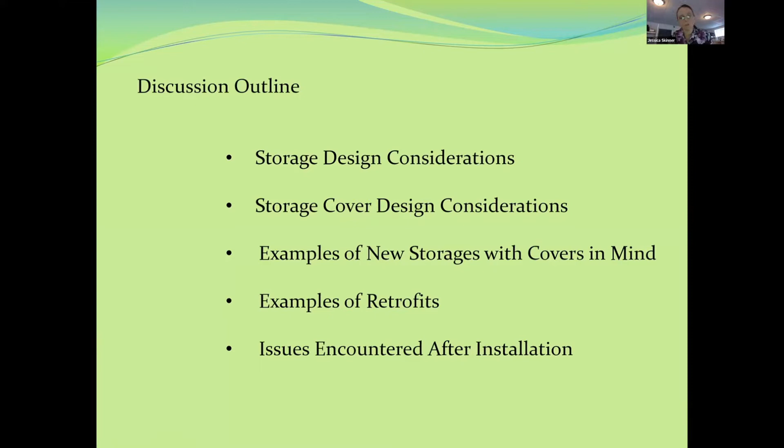Some examples of new storages with covers in mind. Manure transfer in and out. The siting and the topography of that manure storage is going to matter a great deal. Examples of some retrofits and issues encountered after installation. So first, we'll go talk about the storage general design considerations.

Obviously, when we're designing a storage, the very first thing that matters to us as engineers is size. What is the capacity we're going to need? What type of animals do you have? What type of waste are they generating? Other sources other than just the standard manure that you're going to be putting into this system, including, say, for Dale on a dairy farm, you're looking at milking center waste, likely silage leachate control, things that are going to affect the overall size of that storage.

Bedding material also affects what this storage is going to look like tremendously. You heard Dale talk about a few different types of bedding they've used in the past. One that is pretty popular in New York State is sand. Sand bedding does affect a manure storage design more than any other type of bedding. So if you bed with sand, you either have to have a very extensive sand separation system, or you need a way to get into your manure storage and remove that sand.

If you're bedding with solids and sawdust, you can re-agitate those materials from above and don't necessarily need the access to the manure storage. You also notice that Dale pointed out, rightly so, that separation is a huge part of any system that's going to have a cover in it. So is that something that you're willing to look at?

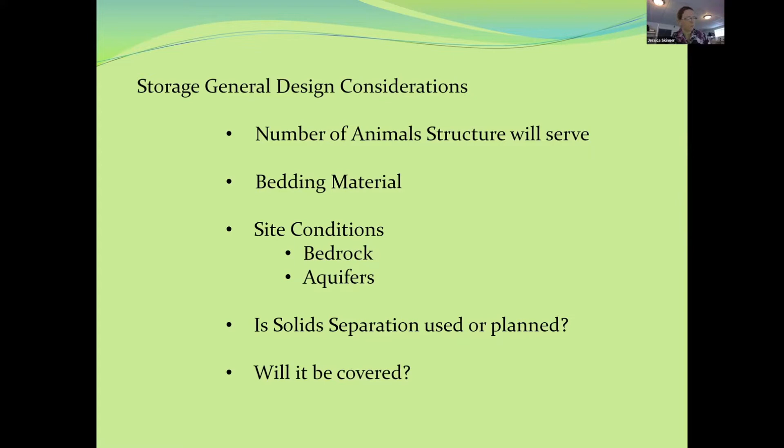So storage design considerations, what type of storage? In New York State, we do mainly 3 types of storages. Earthen, and in that I would consider earthen with both a clay liner and a synthetic liner. So that would be the earthen storage option. Concrete storages, most of those are a vertical walled structure in New York State. And then we do some Slurrystore type structures, which are the glass fused steel type structures. Each of those structures has their own benefits and drawbacks.

With the earthen storage, they're much more easily covered. The concrete storages can be covered in certain situations, but it's a little bit more difficult. And then the Slurrystore structures tend to have a size limitation, so they can be covered. Slurrystore actually makes a cover that goes right on those, but they have a limitation on size of those structures.

When you're designing a manure system, think about your storage pumps. Do you have existing storage pumps? What kind of a riser do you want? Do you want to be able to pump into and out of the storage from a riser? Do you want to pump in and out at surface? Things like that are going to matter to you.

Distance to electrical service, which didn't used to be an issue, but if you want to be able to pump out of a riser, sometimes those are an electrical submersible pump. Also, if you're going to be covering a structure, Dale's flare was solar powered, but a lot of the flare companies do prefer to have a direct connect to an electrical service. And also the pumps for the rainwater, it's easier if you have a direct electrical service.

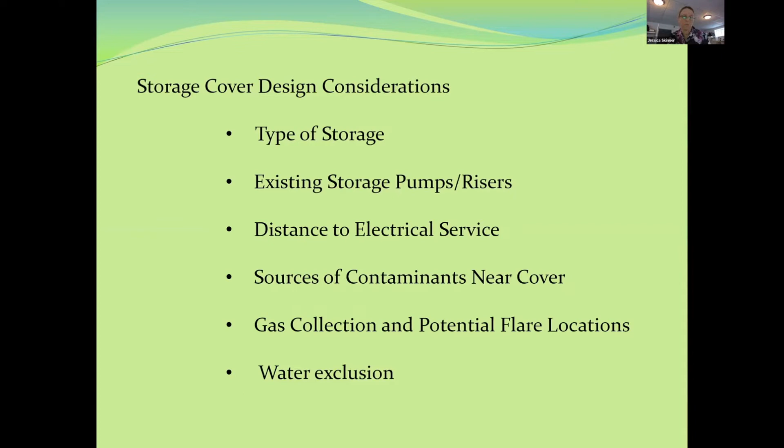So I think what we'll do now is go through a cover installation, kind of start to finish. This is a cover that was installed in Erie County. Alan Young from Erie County Soil and Water took all of these pictures for me during installation. This was a retrofit on an existing manure storage, and we'll kind of just go through the steps that were taken on this particular storage first. I'm going to use my mouse here.

So this picture up here in the upper left-hand corner is a manure riser and pipe into the bottom of the structure. So one thing to think about when you're doing a manure storage, either retrofit or a new design, is that the cover needs to be sealed. And how are you going to get manure into and out of the structure? This pipe going in on the bottom creates a liquid seal. The manure level is above this pipe. So they can pump in and pull out whenever they'd like without opening the cover or breaking that seal.

Over here on the right-hand side, you can see this is the manhole structure, pipe going out of the bottom, and they can introduce from the top or put a pump in the top to pull back out again. Oh, shoot. That just, there.

Down here in the lower left-hand corner, you can see they're getting the cover ready for installation. So one thing to think about when you're covering is you need space to be able to weld the cover together off to the side and then pull it over the storage. So you need a pretty big space to be able to accomplish that. Over here on the lower right, you can see that they are welding together. Dale talked about the concrete weights on his cover. So all those are pieces of cover material welded together and filled with concrete to make the troughs to collect the water.

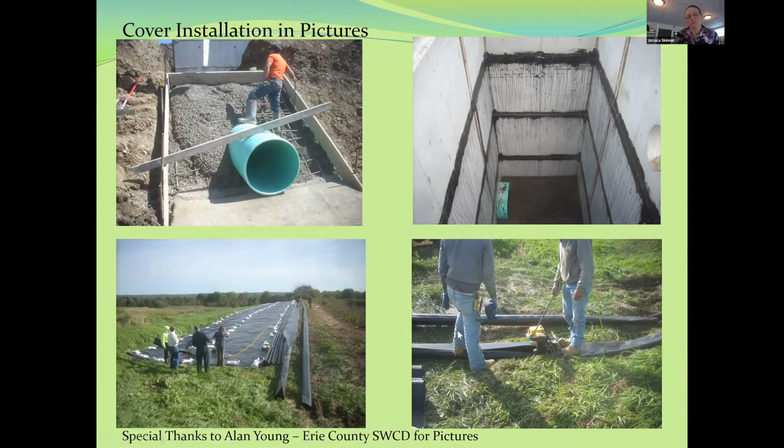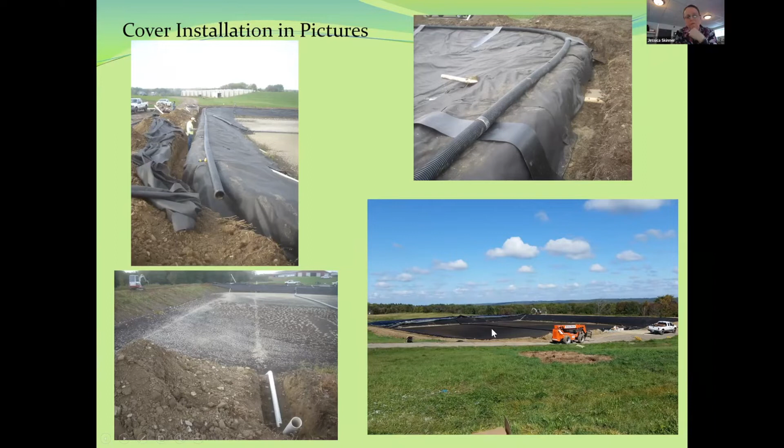They've pulled it across more. They're pulling it across a little bit more in this picture. They float it right across the manure storage when there's liquid in there. So you don't have to have it all of the way empty. You have to have it at a specific level for them to pull it across. That's part of the planning process that Dale talked about. You need to make sure that your liquid level will be at the appropriate level for them to cover when they're able to come.

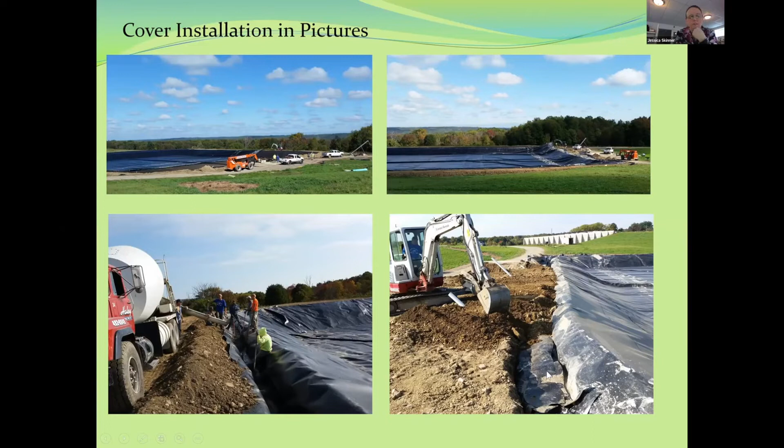This is the stabilization trench. You can see that the cover goes down in, back up, and then they backfill it with concrete. This is just the cover as it comes all of the way across. And then here it is. Here they are finishing up backfilling that trench. So that was a retrofit.

So one of the things when you're designing a manure storage with a synthetic liner, you need to design that anchor trench differently if it's going to have a cover than if it's not. So if you don't have a cover, a synthetic liner just has an anchor trench that's backfilled with earth. Whereas if we're going to put a cover on the top eventually, you want to backfill that with concrete. Small changes like that in the design.

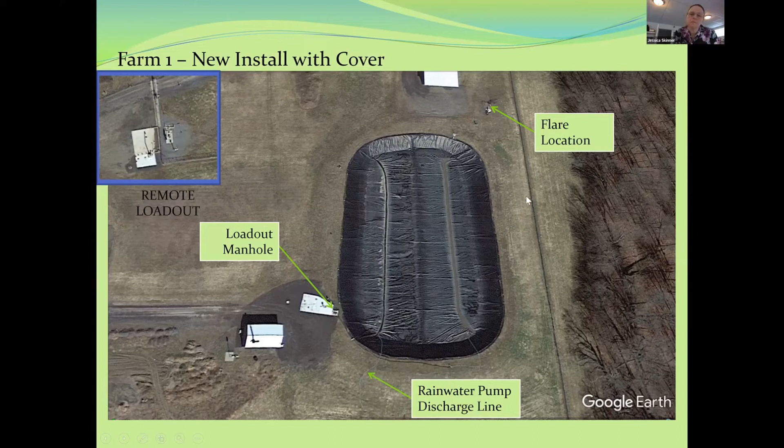So we talked about the manhole. This is actually the finished manhole for the project that I originally showed you. It was a retrofit, so this was installed later. They originally pumped over top of the manure storage structure to load and unload, and this was a retrofit to allow us to cover. This is just another version of the same thing, but this is a circular manhole that's a little bit smaller with a circular discharge pipe.

And this is another view of that same structure, just to give you an idea what that looks like. You do have to site this so that the stabilization trench for the cover can go between that and the top of the wall of the manure storage.

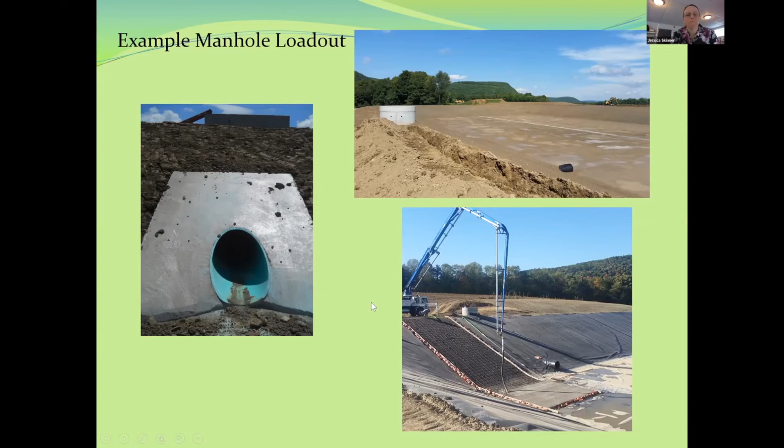So I'm going to now go through some retrofits. This is the first retrofit that we did in 2009. This is 2 manure storages covered with one. You can see they have solid storage around here, and the liquids from that go into here, and then they covered these 2 storages. So there are some storages because of the solids that will not be able to be covered, or it would be very difficult to cover, but this farm has chosen to cover the ones that were easier to cover.

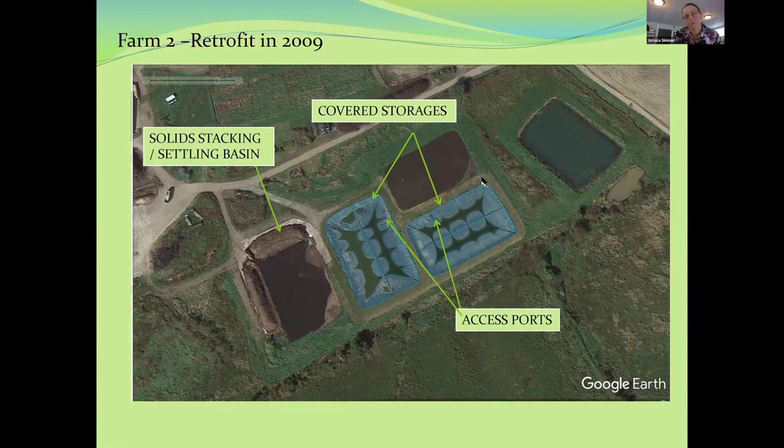This farm was the very first one we did, and they did not have a way to get manure into or out of the structure without going over the surface, and did not do a retrofit. If you look very carefully where these arrows are pointing, you can see access ports. So when they need to get manure out of this structure, they go and open a port on top of the manure storage and then put the pump in there. You can see the rainwater's collecting, clean rainwater collected here. The ports, to me, are a little bit of a safety issue because you're standing over the manure storage, opening a port where gases can escape at you when you're opening the port. I prefer the manhole type structures.

This is another retrofit done in 2010. You can see the manhole structure here in the corner that was retrofit. So this also was a retrofit. We put the manhole structure in. You can see the stabilization room for the stabilization trench. We try to leave about 5 feet there. This was an earthen lined structure, so we had to repair the earthen liner when we put this in. The manhole was installed here in 2010.

The other thing when you're installing a cover, it generally discharges to the flare. However, there needs to be an emergency relief valve so that if something happens with this flare, there's a way for the gas to escape the system and not build up. This farm has a circulation manifold here. So he has the circulation lines that I had showed you previously on the install pictures. And he chose to put a manifold together so that he can just turn valves to be able to recirculate manure through his system.

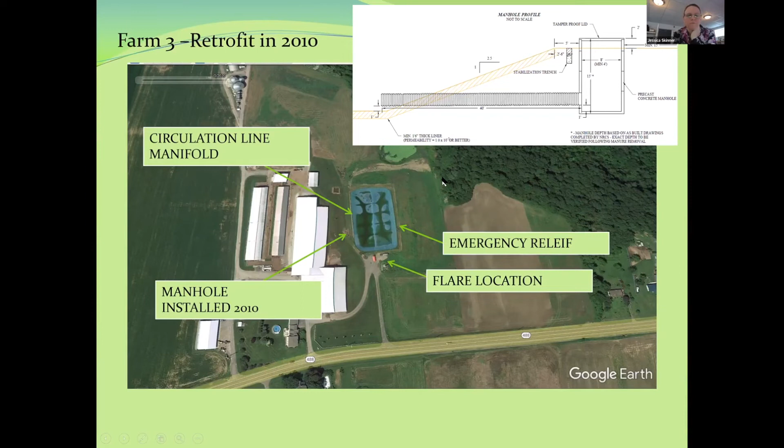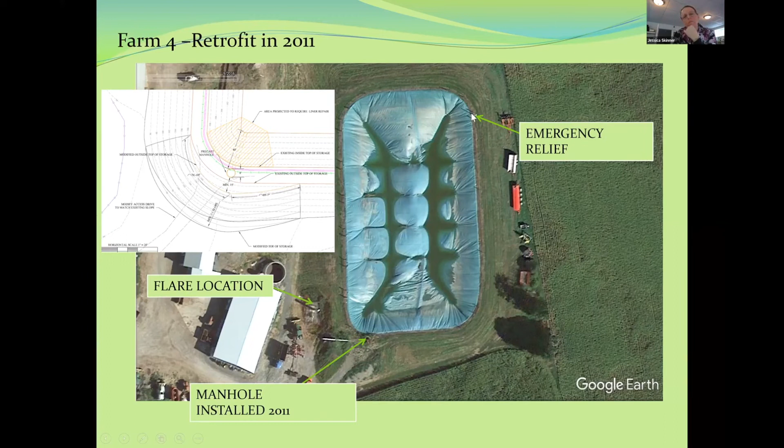This is another retrofit done in 2011. On this one, you can really see the gas buildup just because of the time of year that the photo was taken. This also has a retrofit for the manhole and line that was installed. A lot of the storages built in the early 2000s, late 1990s, had an over the bank discharge into the storage and then just a pump drive-in to pull manure out. This is the flare location. Flare location needs to be at least 75 feet from the storage. So sometimes that can be a bit of a challenge depending on your site. And then here's your emergency relief valve over here on that particular storage.

This actually is a picture of Dale's cover that was done in 2012. Rainwater discharge points that you can see here, that flare location that he had here. And the main reason I wanted to show this, there was a couple different things on this site. One, this was a retrofit and they had these access pump out locations installed before the cover went on. So to attach that, instead of just going into a stabilization trench, you have to come up with a way to seal that to the concrete. So this is just the detail that we use to seal it to the concrete, but definitely something to keep in mind.

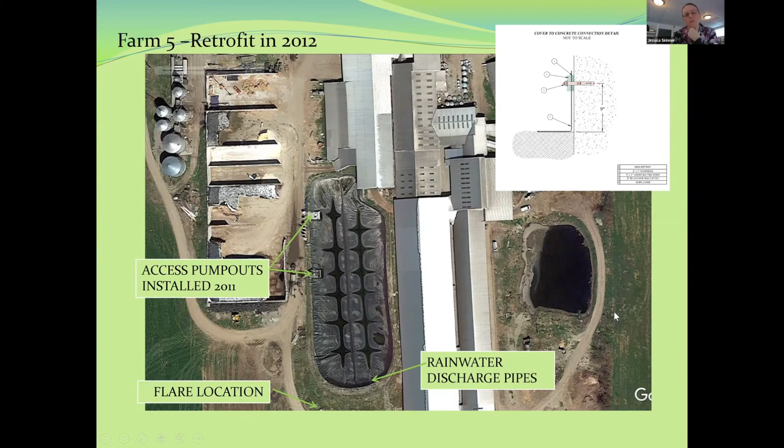And then the other reason I wanted to show it was the potential for silage leachate to get down onto this cover and potentially contaminate that cover. It's something you really need to think about during design, but also if you're going to be discharging that water. Dale collects all of his and uses it for irrigation, so there's no issue there. But if he was discharging that to clean water, it's something when you're turning those pumps on, you need to really pay attention to. This is the finished product of the retrofit that I showed you all the photos of. You can see a lot of gas production on this one.

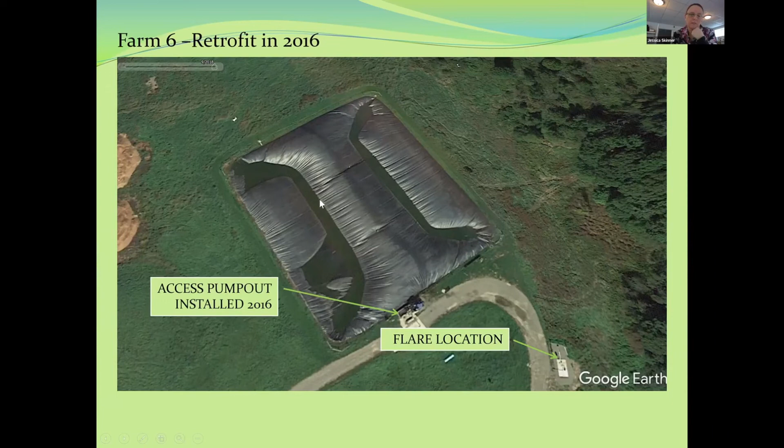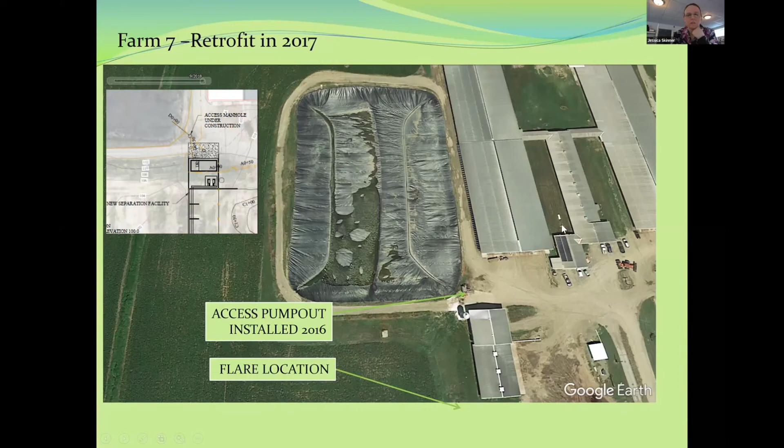This is another retrofit with solid separation installed. So this farm did not separate solids. They installed the separation building. Flare location here, access point here that was installed in 2016 prior to the cover in 2017.

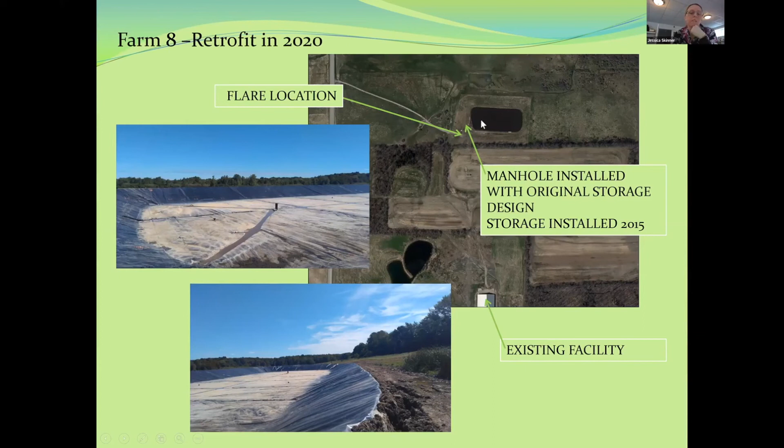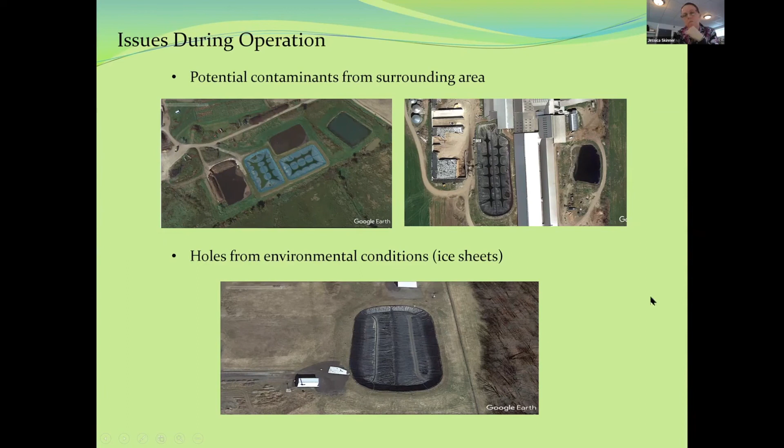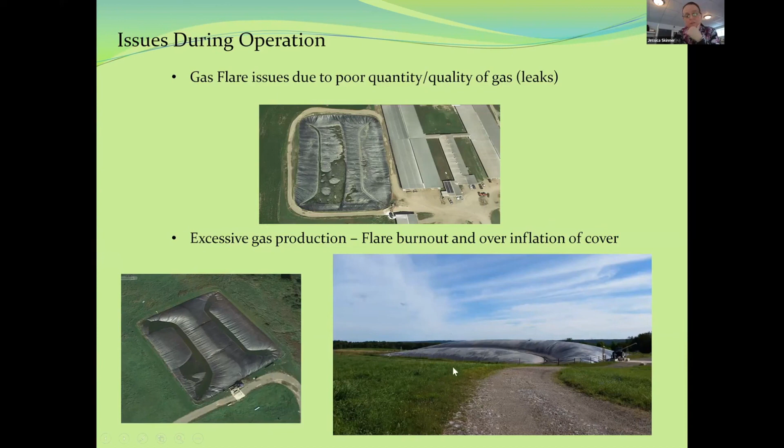It is in a location where there's a natural gas well, and this storage, when they constructed it prior to my involvement, did hit shale in this lower corner that was lined with clay. Maybe there's something there, I don't know, but that's one of those issues that you need to keep in mind when you're doing things and why it's so very important to have an emergency relief valve. So that concludes my presentation.